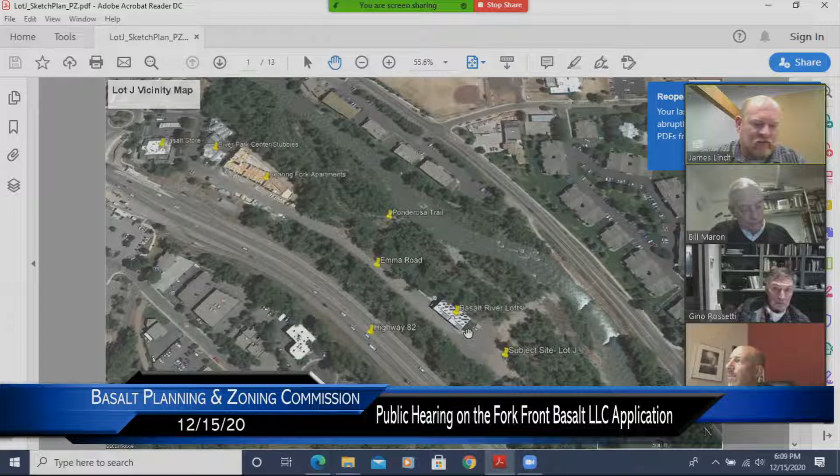The PUD currently permits a mixed-use building with commercial on the first floor and residential on the upper floors. The proposal is to construct a 100% residential building of 12 units on the site, as well as to amend the PUD to allow for a building height of 33 feet instead of the 30-foot that is currently in the PUD for the site.

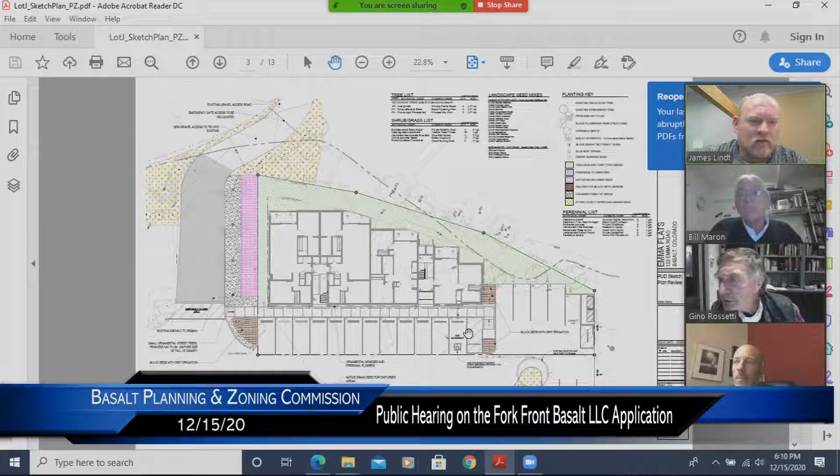The building is proposed to be — I'm sorry, Gino? No, the PUD currently permits commercial on the first floor and residential on the upper floor, and they're requesting to amend the PUD specifically for this lot to allow for a 100% residential building.

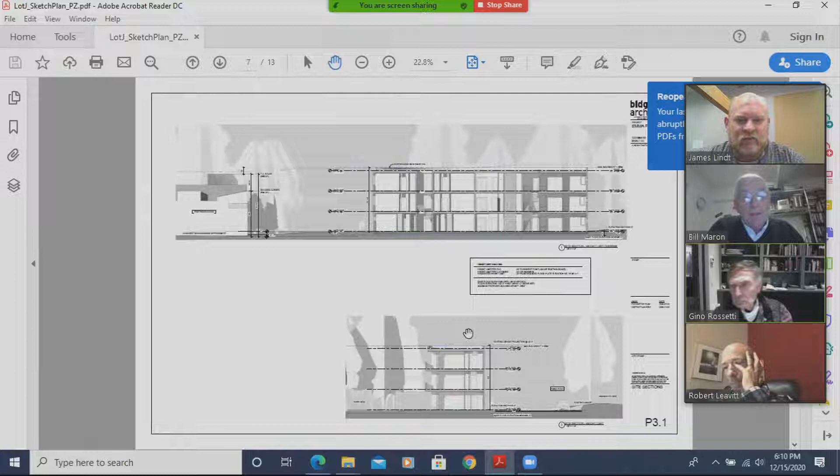Of the 12 units that are proposed, 3 are proposed as affordable housing units, and I'll show you the floor plans. All of the affordable housing units are proposed to be 2-bedroom units, with 1 proposed on each floor. All of the units are proposed to be Category 2 deed-restricted affordable housing units.

The review process, as I mentioned, is a sketch plan review. The applicants chose to split it into a sketch and final plan review in order to get an understanding of whether the concept is generally acceptable before going to the expense and time of having final civil engineering drawings done, as well as hydrological analysis and modeling needed for the final ESA review. So there'll be 2 rounds of review with the P&Z and council, this being the sketch plan and first round of review.

In reviewing the application, staff identified a series of discussion items that are in your staff memo, and I've got the most significant ones here up on the screen. The first being consistency with the master plan. It's identified as mixed-use commercial on the future land use map, but the master plan identifies a density range allowance of up to 12 units for the site, and it also discusses this as being a good place for residential within a quarter mile from transit, as well as close to services.

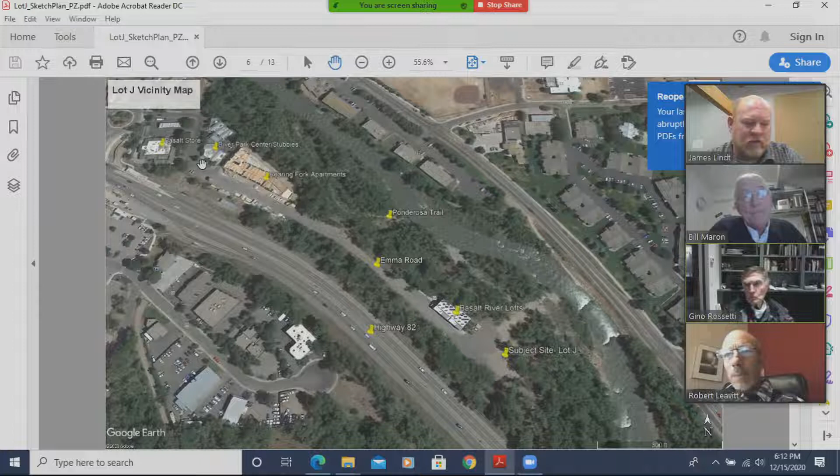As I noted, there are two PUD amendment requests being made. The first is a use adjustment to permit a 100% residential project instead of the mixed-use project on the site. The second is to increase the building height allowance from 30 feet to 33 feet for this property. In evaluating these requests, staff is accepting of the amendment to permit 100% residential, as there is a significant need for rental housing in the Mid-Valley.

On a weekly basis, staff hears from employers who are trying to hire but are having trouble finding rental housing for their employees. And as mentioned, it's near BRT as well as services downtown.

The building height request, as mentioned, asks to change the PUD to increase the allowable height by 3 feet. 1.5 feet of that is proposed for a parapet to screen the PV panels proposed on the site. The other 1.5 feet is to make the units more livable. As background, the neighboring Basalt River Lofts was held to a 30-foot height limit, but their solar panels were allowed to extend above that limit, as permitted by town code. Staff believes the parapet to screen the rooftop appurtenances is consistent with the design guidelines in the Basalt Commercial Park PUD, and that the height would be consistent with the underlying C3 zoning.

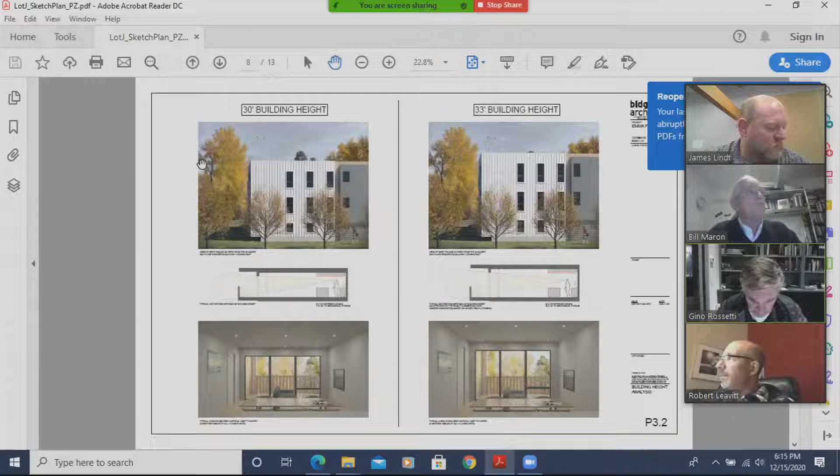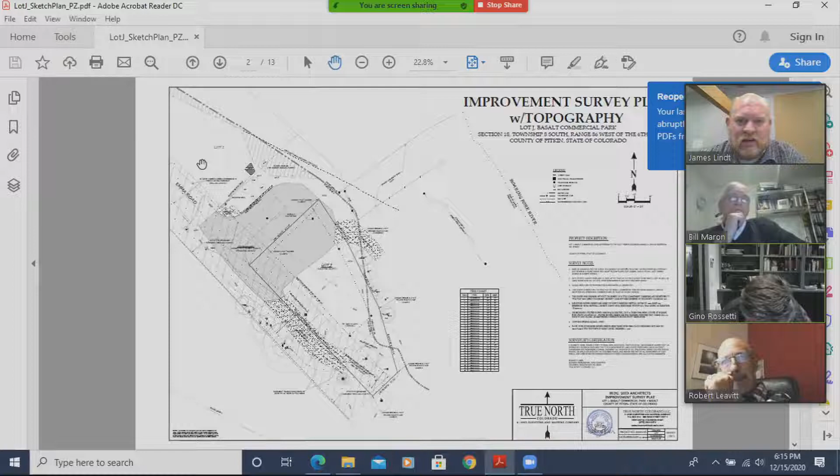Other discussion items include access and parking. Access to the site is from Emma Road, a private road maintained by the HOA, as established in the original PUD approvals. Lot J was allocated 17 parking spaces in the original platting of the subdivision, but the 12 proposed units would require 26 parking spaces. The applicants worked out a site layout that includes the 26 required parking spaces while preserving a significant ponderosa tree, located here, that staff asked them to preserve.

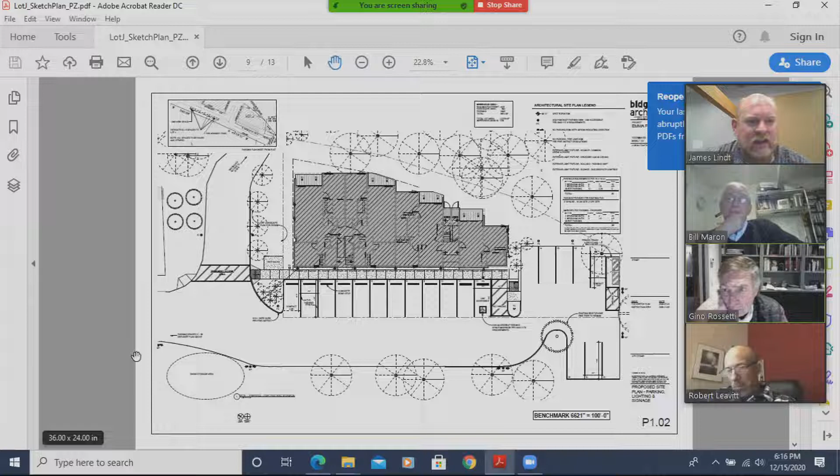However, today staff and the applicants were made aware that some owners of the Basalt River Lofts building, located right here, had concerns about the parking proposal, specifically extending Lot J parking in front of their building, which is part of the proposal. So staff is ultimately going to recommend that the P&Z continue the public hearing to January instead of taking action, to see if the applicant, Basalt River Lofts, and staff can try to resolve the Basalt River Lofts' concerns related to parking. But we'd like to continue through the other discussion items here.

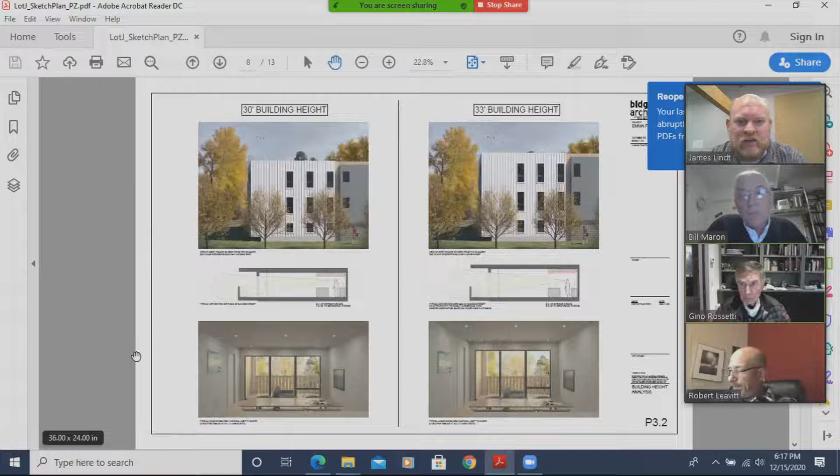Affordable housing mitigation is one of the other discussion items. As noted, there are 3 affordable housing units proposed. Let me go to the floor plans - they're the units shown in pink here. They're all proposed as 2-bedroom units, proposed as Category 2 rental units for rent by people and families making at most 100% of the area median income and working at least 1,500 hours per year between Aspen and Glenwood. They meet the 25% requirement for mitigation of the units, as well as meeting the square footage requirement of providing deed-restricted housing for 25% of the square footage.

The applicants did add exterior storage closets per staff and homeowners association recommendations, to provide some storage exterior to the units. The Basalt Affordable Community Housing Committee, BACH, reviewed the affordable housing units and felt they met the livability guidelines in the town's community housing guidelines. Staff has provided a condition that they provide draft deed restrictions as part of the final plan application for evaluation.

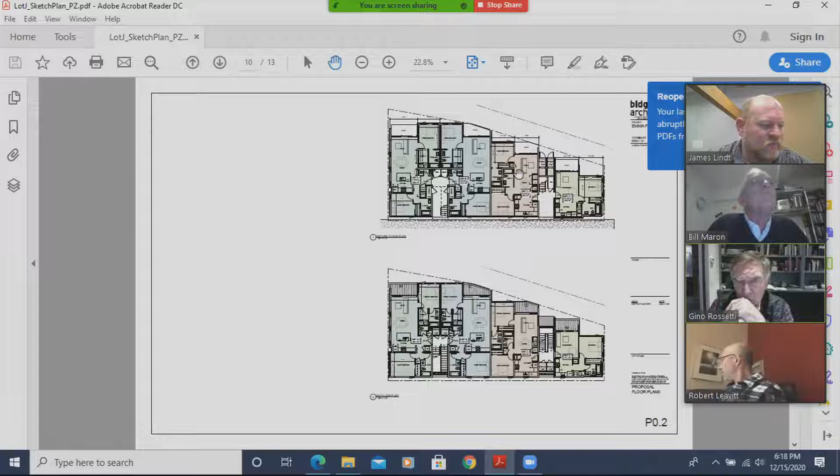Other discussion items for the sketch plan review include the environmental and green aspects of the development. They're required to meet the town's sustainable building regulations, the SBR requirements, and they're proposing to provide solar to meet the renewable energy requirements of the SBR.

Additionally, they're required to meet the wildfire mitigation requirements that were recently adopted by the town, which P&Z and Town Council reviewed. There are requirements in the draft conditions that they show how they're going to satisfy the SBR requirements as part of the final plan application, as well as demonstrate compliance with the wildfire mitigation requirements as part of the final plan.

In terms of referral comments that have been received, we received comments from the Fire District, the Basalt Sanitation District, as well as verbal comments from RFTA and the school district.

The Fire District felt that they had acceptable access and that they needed a fire hydrant, which is included in the plans.

The Fire District also recommended that the type of trees proposed on the fire turnaround, located right here, should be evaluated to look at another type of tree that didn't have as much height, because they are proposing to serve the building by pulling their aerial fire engine here and then laddering onto the roof. So they need lower trees in this area.

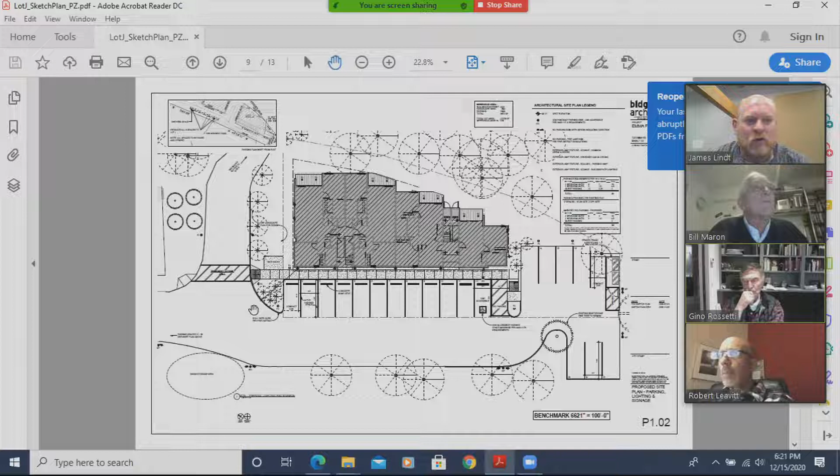That's a variance that has been reviewed by the Sanitation District Board on other projects and granted in the past for rental. So we've got a condition that they go to the Sanitation District Board prior to final review to try and get that variance.

RFTA, in their verbal comments, indicated that this project should contribute to first and last mile improvements to get people to transit.

So there's been conditions included in the draft requirements that would require the applicant to pay towards bike and car share, as was required of other projects, including the 525 Basalt Avenue project reviewed in the last year or so. The school district also provided comments requiring that the applicant pay school land dedication fees, and that's been included in the conditions.

As I mentioned this evening, staff recommends considering applicant comments, taking public comments, and then providing P&Z discussion.

After the P&Z discussion, staff would recommend continuing the public hearing to January 5th to see if there are parking alternatives that can be worked out to address the parking concerns of the neighboring Basalt River Loft residents.

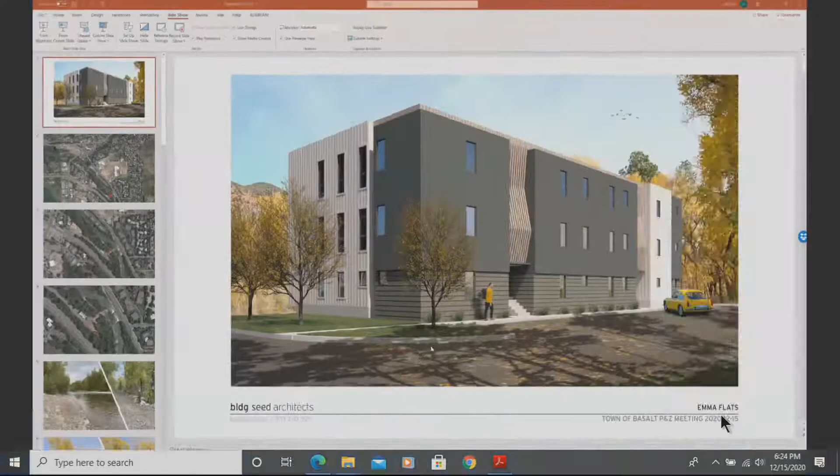First of all, I just want to apologize, we have a little technical difficulty as we're getting started here. I realized the web link wasn't working, and I had to shift to my phone, and I've got some notes in front of me, and I'm just going to run through it verbally with you guys while Jeff leads the discussion. Jeff, do you want to open up the PowerPoint?

We can do it slide by slide, please. Yep, can everybody see my screen? I see the PowerPoint, not the presentation. If you go to the bottom right, there's a presentation mode. Yeah, let's see.

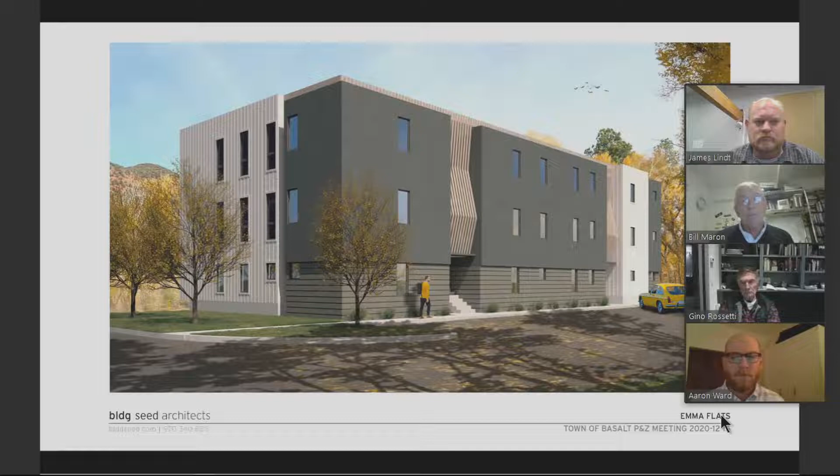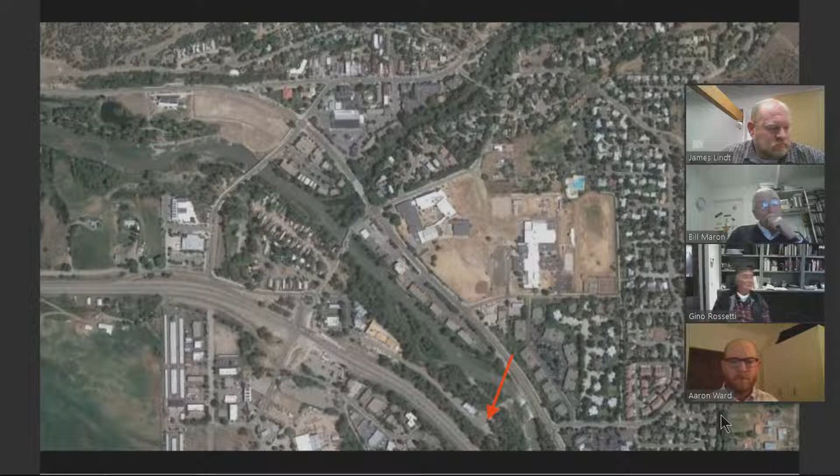Zooming in a little bit, you can now see we have a really good proximity to the RFTA bus station that was recently put in. It's beautiful there on the corner of 82, and it's an ideal location for a transit-oriented housing development, which is what we're shooting for. You can also see the 56-unit Roaring Fork Apartments, as well as the 4 units of Basalt River Lofts adjacent to us. One of the takeaways from this slide is that we really feel the transit-oriented first and last mile aspect of this is going to lessen the parking and traffic needs in this area.

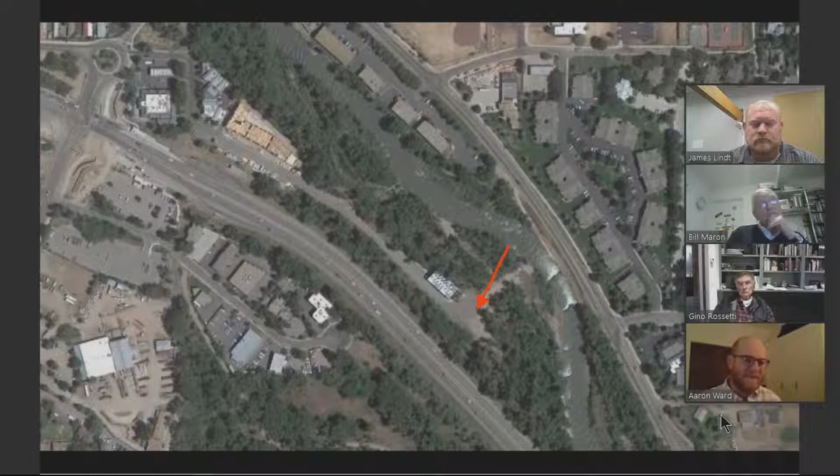This drawing shows basically the footprint of the site, not the building. Here you start to really see some of the advantages of this site, as well as some of the constraints. One of the greatest advantages is right behind us — on the north side, it opens up to a forested, wooded area, and beyond that there's a Ponderosa Trail and the Roaring Fork River. In opposition, on the other side we have the main access drive and the roar of Highway 82, which coincides with where most of the solar heat gain would hit our building. The east face is also a great aspect. We really only have one side with a neighbor, so three sides are open to views and opportunities not tied to a neighboring property. Right next to us is the Basalt River Lofts, roughly 65 feet away from our building envelope. Next slide.

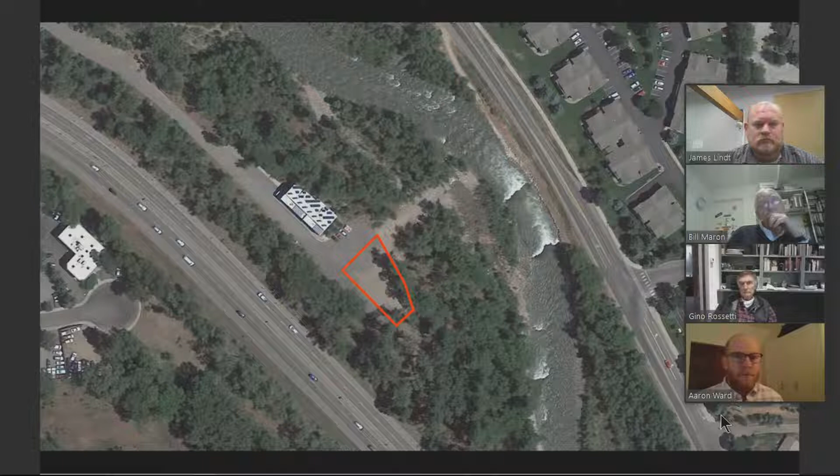Zooming in here, you can see some of the great opportunities of nature adjacent to this 12-unit development we're proposing. We have this wonderful wooded area and then the Ponderosa Trail beyond that, which in this picture is just under construction and finishing up now. Being next to the river on the bank is a great opportunity for people to have a great quality of life in that area. Next slide.

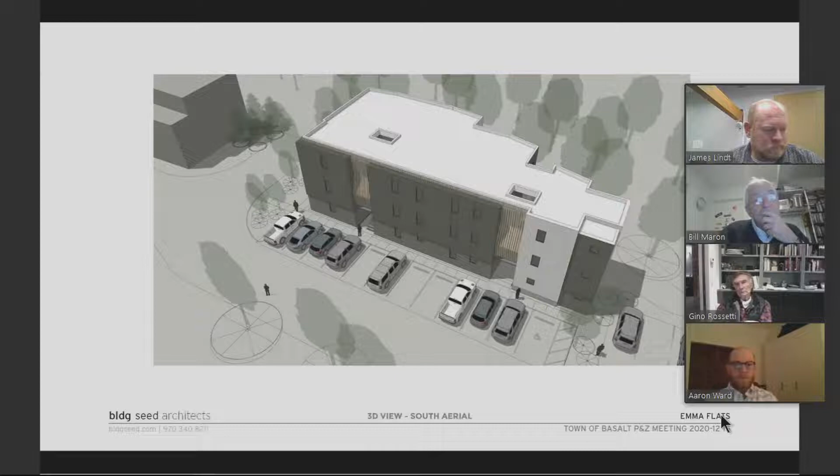Because of that reason, and also with the west-facing aspect of the frontage of this building, we wanted to really open the windows up to the back, with smaller but appropriately sized and detailed windows on the front side. Go to the next slide, Jeff.

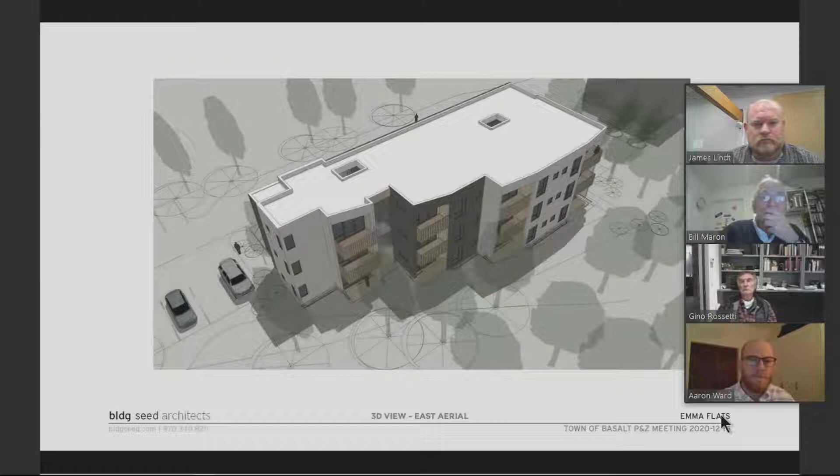On this back side, you can now see opening up to the forest, big decks and balconies and large expanses of glass to invite people into the natural environment and create a wonderful setting for them. Go ahead and go to the next slide.

One thing we want to iterate here is that we really tried to break down the massing of this building, both vertically and horizontally, and introduce warm and durable materials. So by breaking down the massing, we created a break in material right at about the first floor height, which gives a residential and human scale to the building.

So we really did what we could to have a density building that promotes a lot of units and affordable units, but also break it down and articulate it nicely.

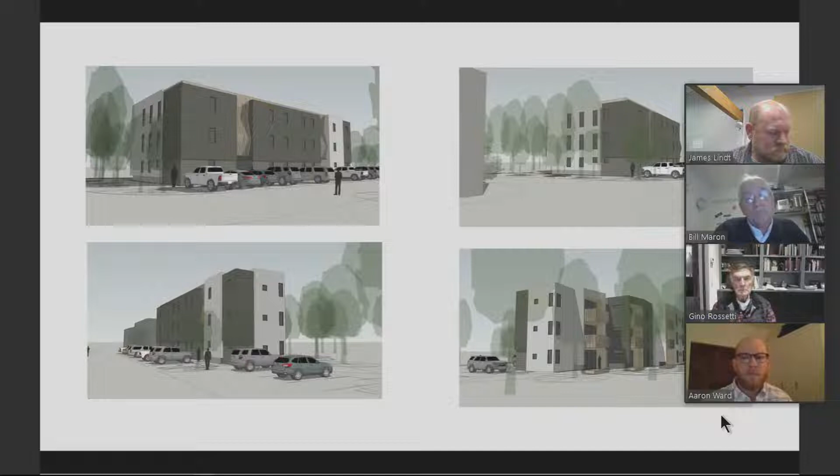The last thing to mention on the building design would be that we made a conscious effort to respect the Basalt River Lofts architectural style. I used to work for Harry, and I have a lot of respect for his architecture. We wanted to create a contemporary building that paid tribute to that and was fitting in the neighborhood. Go ahead and go to the next slide.

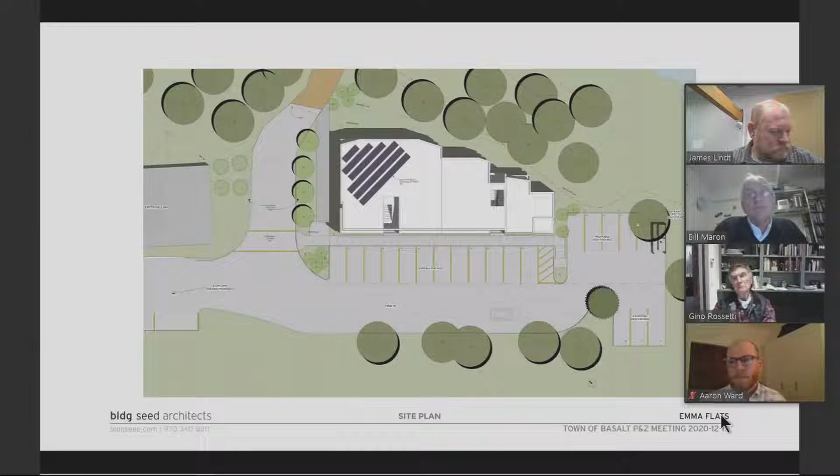We worked really hard to integrate our design with the needs of the emergency access so that it's seamlessly developed here at the end of the block. I guess go ahead to the next slide.

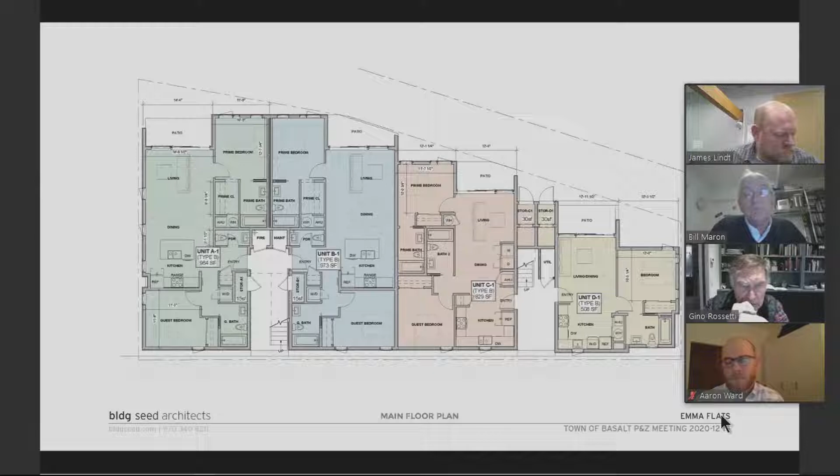I'll also mention that 75% of these are 2 bedroom, 2 bath, which is a recognized void in the community and something we need more of. And 25% is going to be 1 bed, 1 bath, which is really a fully equipped unit with washer and dryer, highly efficient, and also in high demand for this project type.

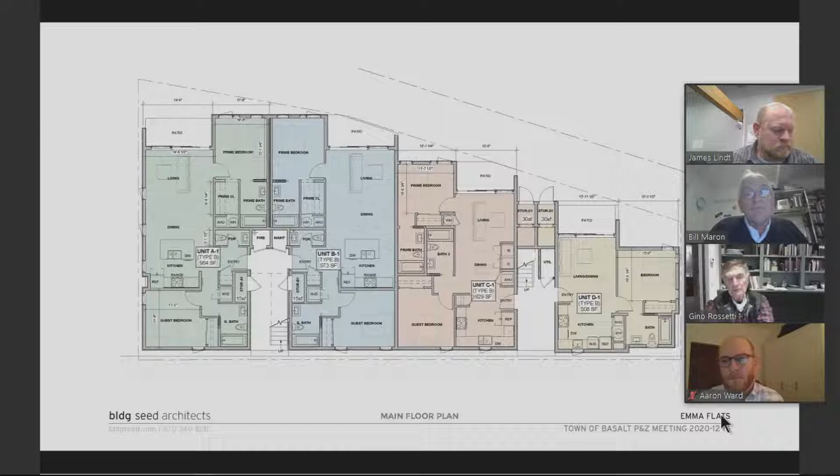On the first floor, we'll also mention that this whole level is type B units, which means it's accessible ready. Speaking to inclusive living, we made the full first floor ready for wheelchair accessible development.

So if you go to the next slide, we'll look at the second and third floor. They're really the same, so we can toggle to whichever one we want right now. But once again, the opportunities of the decks and balconies off to the back side is an important element. Good quality finishes throughout.

We're proposing to have Caesarstone or stone countertops, wood floors, can lighting, and nice high ceilings. So we're trying to do this thing right and create some quality product in the Basalt area.

The last thing to point out in the floor plans would probably be what James already mentioned, and that would be the addition of the gear garages or gear storage areas that the town of Basalt emphasized, and we incorporated that so there is no unused and underutilized section of this floor plan. Go to the next slide.

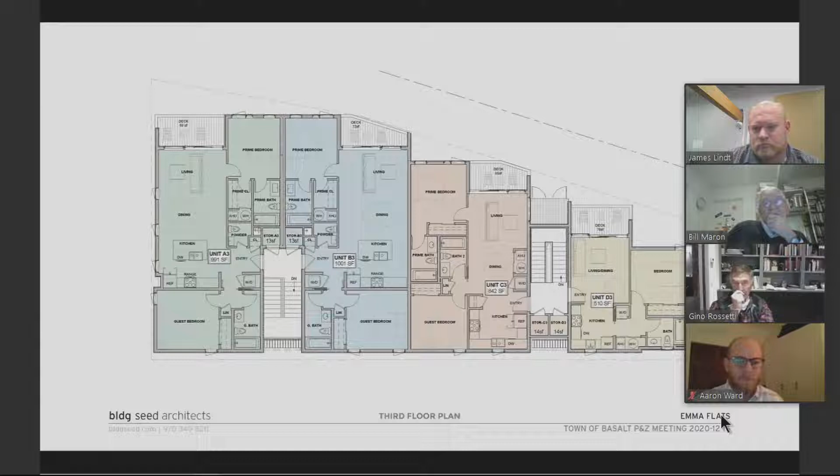I guess the next one then, because that was just the third floor. Okay, so now I want to take a break from looking at our plans and the site, and talk about the planning elements that are emphasized by the master plan of Basalt.

We really did pay attention to this document. We used it as a guide and tried to make sure that our development is hitting the intents of that. It's wonderful to work in a community that has a document like this that was so recently prepared, that we can cater a design to and really understand the priorities of the community.

So, theme 1, people and community character. I think where we really hit high marks is the smart growth category. It's definitely an urban infill project, within the core of the community where we do want to see development, and it achieves a needed housing goal. It also has the benefit of created outdoor space next to us in that plaza area, which I think has high value.

Go to the next slide. So theme 2 is affordable, inclusive living, and I think of all the categories, this is the one where we're really shining the most.

Aaron pointed out that there's a shortage of 1,900 units for 100 to 120% AMI, according to a 2017 study, and that's projected to get worse. So hitting 12 units and maximizing the potential of unit count and quality units in this development really helps with this goal. These are obtainable apartments to help satisfy the housing shortage versus the unobtainable high-end for-sale condos that developers so often aim for. We're doing a very different model here.

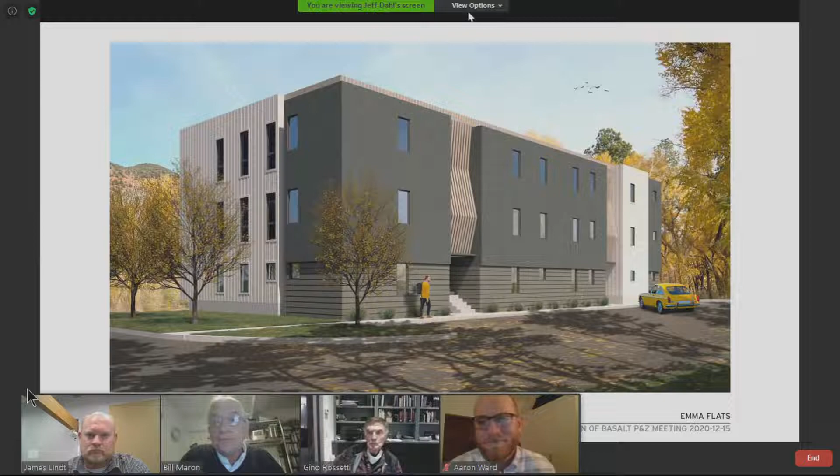No, I think Ramsey did a pretty good job. Just a little background on me: I own a small commercial appraisal firm in Basalt. I live in Basalt. We had a few employees at one point, and the cost of housing became such that our employees are all now remote in Durango and Denver. So the need for housing is very apparent to most people who live here, and that's why, to drive it home, I decided to go the rental, an apartment property rather than a high-end condo project.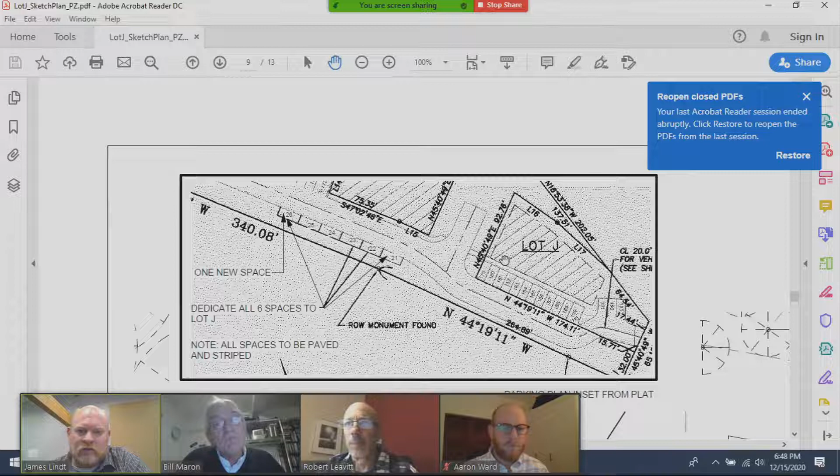The applicant was proposing to extend that number of parallel parking spaces further to the west. You can see it in the inset here, let me zoom in. So here's Lot J, here's the Basalt River Lofts. Two of the parking spaces were originally for general parking, and then in the PUD, another couple were for Lot J. Lot J was proposing to make all these parking spaces for use of Lot J to meet their parking requirement of 26 parking spaces.

The concerns of the Basalt River Lofts, as they've indicated, are that they feel these spaces shouldn't be provided for use of Lot J, except for the 2 spaces that were originally platted for Lot J. So staff feels there's a need to try to bring the groups together here and maybe adjust the proposed parking situation to address Basalt River Lofts' concerns. That's why we're recommending ultimately continuing this evening to see if we can have a meeting of the minds to figure out the parking issue they're having.

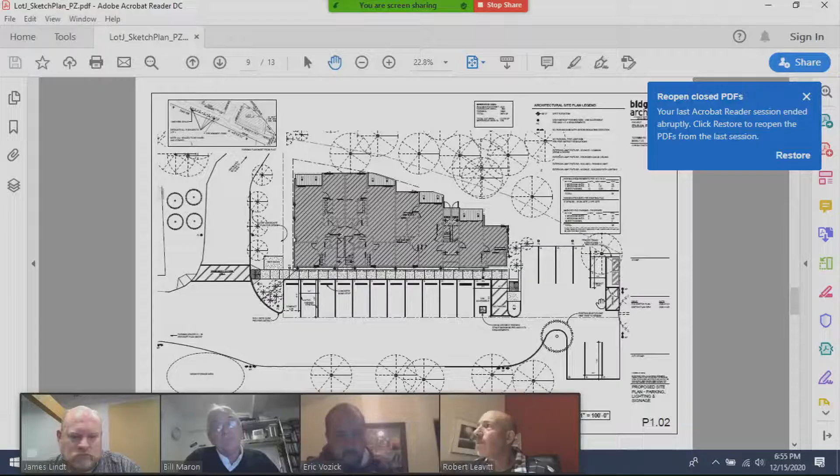Yeah, I'll let Ramsey and Jeff take this one. Sure - James, can you go to our application document and show the sheet that has to do with the 30-foot prescriptive PUD height versus the 33 feet? I think the answer to that really lies in the understanding of that graphic. So right on that graphic, you can kind of see the difference in the building form as seen from our neighbor at 30 feet or 33 feet. And right in the middle of both of those diagrams, you see a section through one of the 12 units.

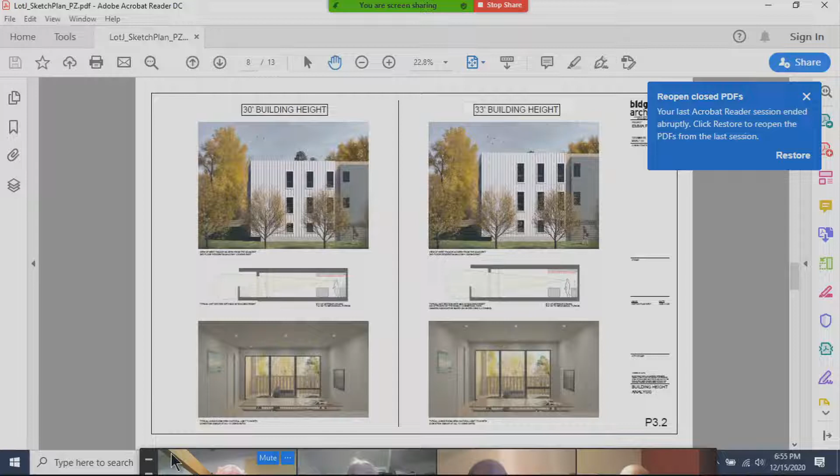And so the quality that we're trying to create here is to have higher ceilings, around a 9-foot ceiling in the spaces. That's going to allow a lot more natural light and less dependency on artificial lighting in the daytime. It's going to create a more open environment, better air circulation, and also better views to the natural habitat.

Furthermore, we're going to have to use ceiling area of the units for mechanical runs to get ventilation and conditioned air to the bedrooms from the main unit area it's coming from. And that's going to potentially drop the unit size, as we noted in that document, from either the 9-foot or 8-foot down about 8 to 10 more inches. So we're talking about a sub-8-foot ceiling in some of the areas. And so it really has a lot to do with quality as well.

But then, about 18 inches of that - as James wrote in his write-up - that we had left over staying underneath the 33 height limit we're using for the parapet in order to shield the solar panels. I don't think the 30-foot height limit reflected the necessity to have 3 floors in this. 33 is a very typical and reasonable height for a 3-story building. And with the density, we're just trying to create the quality that the spaces deserve.

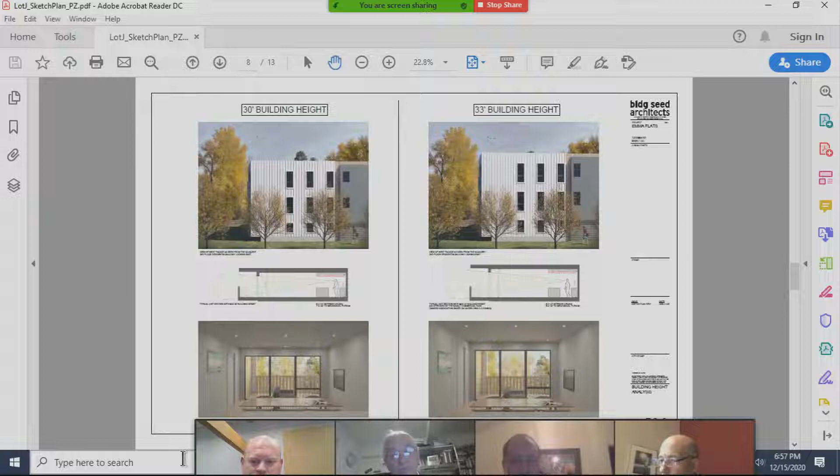No, my only question is regarding the height that was just discussed. In the Basalt Lofts letter to you guys, they were in favor of everything except the 33-foot height request. Did you have a discussion with them regarding that, and any more detail on why they're against it?

I imagine someone from that entity is on the line, so I don't want to speak on their behalf. But in the original meeting with all the parties that have a vote on this matter in the Basalt Commercial Park, it wasn't really highlighted. It came up a little afterwards, and we haven't had many follow-up discussions with them on that subject. Honestly, I think it's a fairly nominal height difference from their vantage point and the distance away, so I'm in the camp of wanting to maintain the quality for the occupants of this building, and I feel like it's a reasonable request. And then one other question regarding the gear storage.

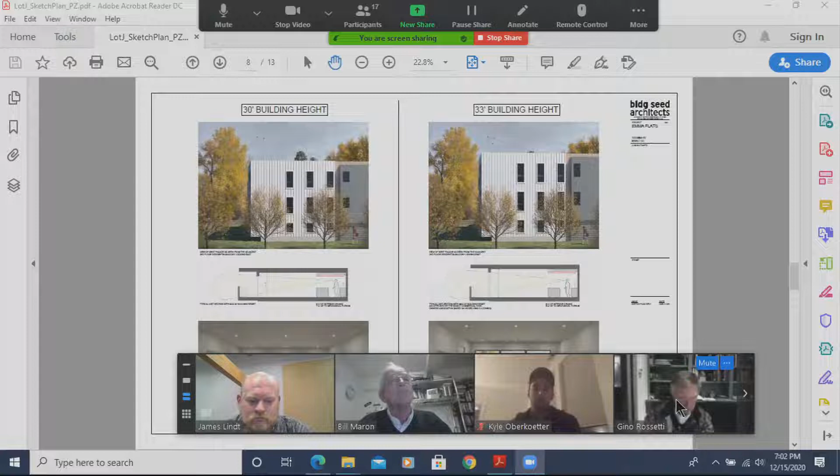Yeah, I mean, I would urge James to show the site plan, but we are pretty pinched in there. We're really utilizing this property to the maximum extent possible. I can't say it's not possible, because anything is possible, right?

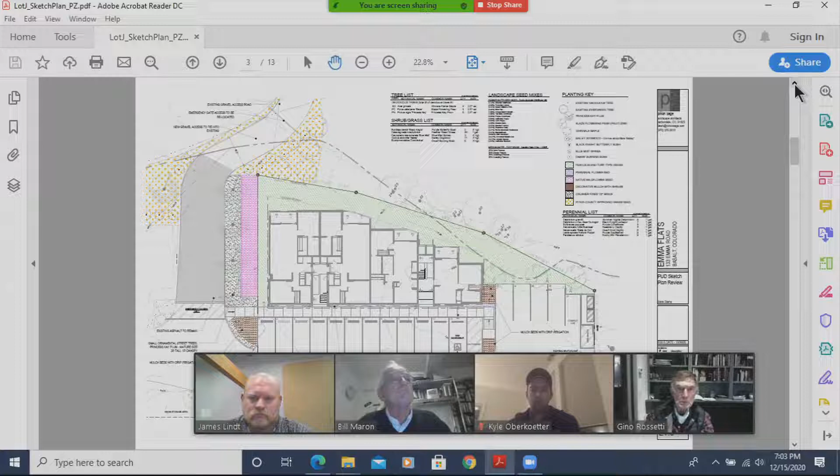I'm pretty happy with the articulation of breaking up the front facade, but utilizing the full frontage for maximizing the envelope for housing and affordable construction techniques. But if you zoom in on the back side, you can see we're really up against the setback line already where we might shift the building back. And towards the right side, the 100-year floodplain starts to become a factor. But anything is always possible, of course.

Good, thank you, that's all I have. All right, thank you, Gino. James, could you put the regular screen back so I can see everyone there? There we go.

Rob, do you have any questions of staff or the applicant? Briefly, is there any chance that this building would eventually become condominiumized?

I might ask Jeff to chime in, but I believe we were given the option of possibly having separate gas lines or something of that nature, and we chose not to have that opportunity in the future because it's fairly solidly proposed to be apartments.

Jeff, do you want to help me with that one? Yeah, it has to do with the sewer and water board, and that was the variance James had spoken to about getting separate lines to every unit versus a single line to the building. If we do a single line to the building, we basically negate the opportunity to condominiumize in the future because then they can't meter it separately anymore.

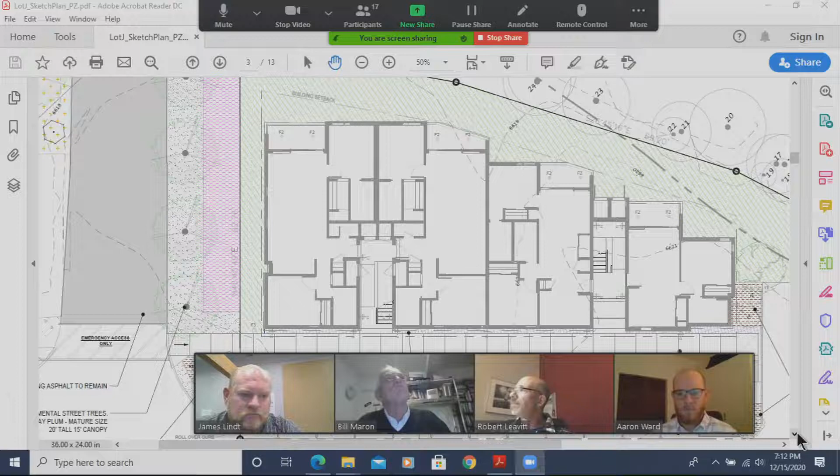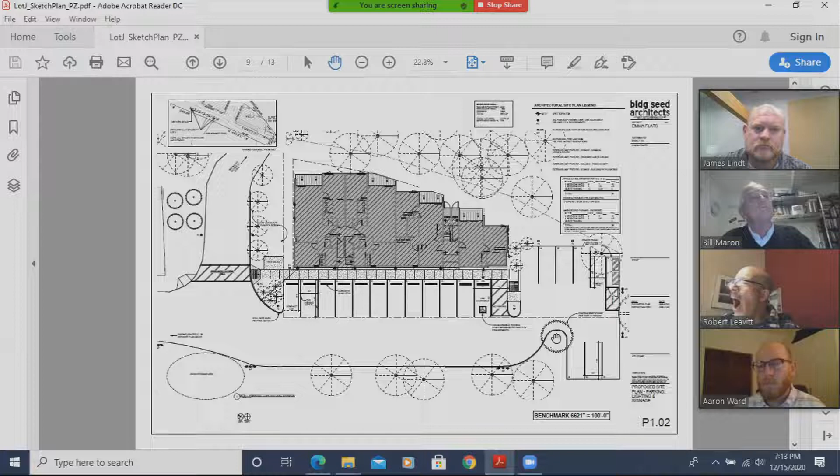James, I think we might want to go to the landscape plan that you had open before. Sure. We do have planting right up against the building between there and the parking that's provided. Behind that, there's a drive that really isn't moving location. As part of our parking scheme, the round 2 parking scheme especially, we took into consideration saving a specific ponderosa pine that the city arborist deemed in good health and worth preserving. The rest of the foliage that's really there isn't in harm's way—it's in that CDOT zone, I would assume, between Highway 82 and our property. So there's the ponderosa pine, the retaining of vegetation beyond the property lines, and also some site beautification of trees on the corner of that peninsula next to parking. Between the sidewalk and the building, we have some low vegetation planned to help block that as well.

Okay, thank you. Rob, is that all you have? That's all I have.

Michelle, do you have any questions of staff or the applicant? I do, I have one quick question for James. I don't want to go down the rabbit hole of parking, but I'm wondering, is it because of the way the right-of-way is platted on the lot that there's not parallel parking on the south side of the site? Well, it's not actually right-of-way because it's a private road, but there are public easements on it. Let me go back and share my screen here, just a quick second.

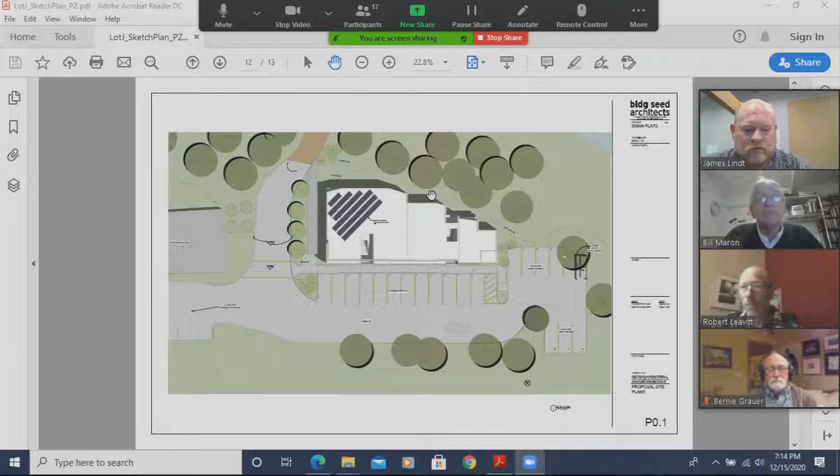So just without knowing what else is there, it just seems like a lot of space. Sure.

So once again, going back to this inset, basically this is a private road, and there are 2 parking spaces that exist. What was platted originally was 5 total spaces here. This line right here is the CDOT right-of-way line, this solid line. So there is room for more parking here that would be parallel.

But as you'll probably hear in the public comments, and as staff heard today, the Basalt River Lofts residents aren't real excited about having Lot J parking more than was previously allocated across from their building. So there's room, but there's concern there, and staff thinks there's probably some room for conversation and maybe looking at some different alternatives to help get a better comfort level from the Basalt River Lofts owners.

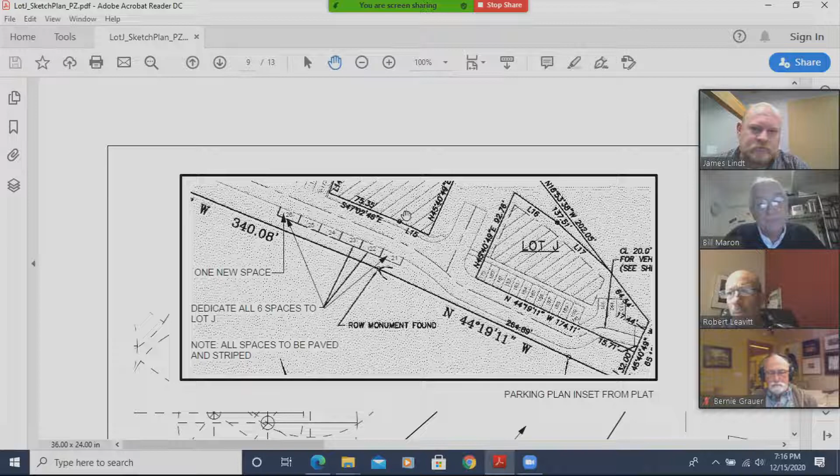Well, that makes sense. I was actually thinking further to the east, so that it would be across from, basically where the tree line is. Let me zoom back out here. Yeah, like in front of the trees. So is the dimension just too small?

Here's the ponderosa pine that is a significant tree that the town arborist and town staff indicated would be appropriate to preserve. You're talking about over here potentially? Yes. That could be something that could be looked at. There is more vegetation over in this area.

And so what we'd also have to look at is the width of the space before you get to the CDOT right of way, to see if you could fit parallel parking there. James, if I could just chime in there. There's not enough width to get parking before you get to the property line and have the distance across the road needed for the fire district to get their trucks in there. So we would love to put it there, but it's not feasible.

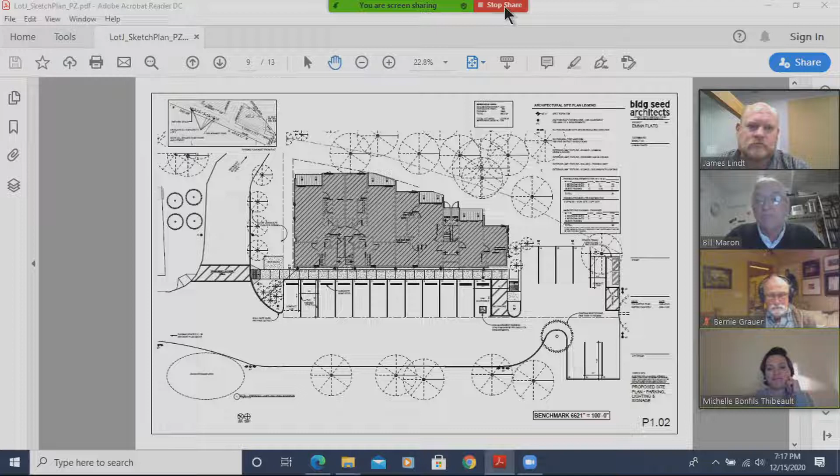That makes sense. Thanks, that's my main question. All right, thank you, Michelle.

Okay, I have some questions I'd like to bring up. The first one is for James. In the current PUD, is the first floor commercial required, or is that just allowed? It's allowed, but there's not an allowance in the PUD for this lot for residential on the first floor currently. Does that mean it's required if it's not allowed? I guess residential is not permitted on the first floor, so you could say it's required. Sure, okay, that makes sense.

I wasn't clear about that, that seemed kind of squishy to me. Okay, and also, again for James, in my packet I didn't see any draft conditions, but I may just be missing it. I went over it 3 or 4 times and didn't see them. Must be some other place, but you don't need to answer that now. I have a few more questions as I go through this.

Let's start with the materials. We spoke vaguely about the materials being warm. What is anticipated for materials that would be warm?

Well, we have the intention of having down low on the elevation, if you look at the renderings, a sort of board and bat, as opposed to bat and board, with some rough sawn stained product down low, and then obviously the slats between the massing that break it up, that become the stair core. That's something that will probably be some sort of composite but wood-like referencing material to keep the flammability down. Then above that, we're really going for something a little more hardy and durable, probably corrugated with a baked-on finish product, and then we have some white area as you wrap around the back of the building.